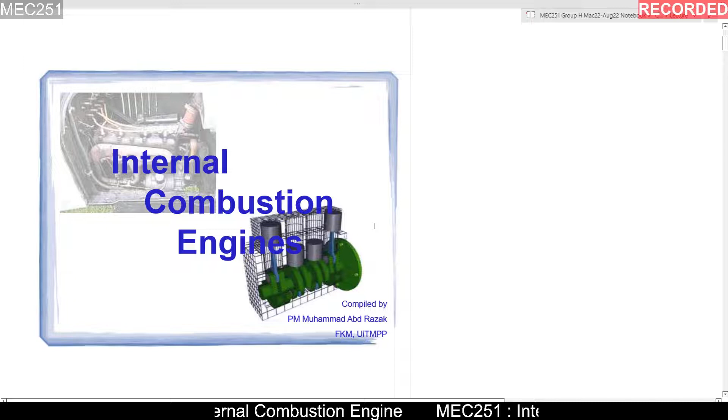Internal combustion engine, I think most of you have already heard about this. The common application is the engine in your car and your motorcycle, and most road vehicles still use the internal combustion engine, but in the future maybe it will be replaced by the electric motor, what we call the EV, electrical vehicle. But for the time being, the majority of transport in the world still uses the internal combustion engine, so this topic is still relevant to our real life.

So the history of the internal combustion engine started from the Otto findings. This is Nikolaus Otto, a German, in 1876. What he found is the system of an engine that uses two processes: one is the isentropic process, and the other is the constant volume process.

So if you want to know a little bit or refresh what you have already learned about the internal combustion engine, you can click on this link here, and it will redirect to YouTube, and you can see a 3 minute video.

And then I will try to explain based on the TS and PV diagram here. For the TS diagram, for the Brayton cycle before, we had pressure constant, but for the internal combustion here, the Otto cycle, we analyze the system based on constant volume. This is because we have a constant volume process instead of a constant pressure process as we found in the Brayton cycle in the previous chapter.

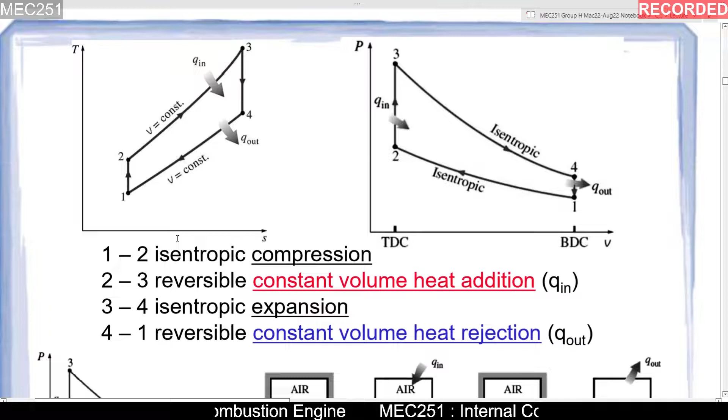So for the TS diagram here, from state 1 to state 2, similar to the Brayton cycle before, we have the isentropic compression. And then the heat addition goes into the system from state 2 to state 3, still similar to the Brayton cycle, but instead of pressure constant as in the Brayton, we now have constant volume here. So please memorize: state 2 to state 3 is the constant volume heat addition, heat addition because of the Q in here.

And then from 3 to 4, similar to the Brayton cycle before, we have isentropic expansion. This is the process that produces the work out, and then finally you have to exhaust, or reject heat outside. Similar to the Brayton cycle, as we found in our car engine, we just remove the Q out by using the exhaust. As you see at the back of your car, there is an exhaust pipe.

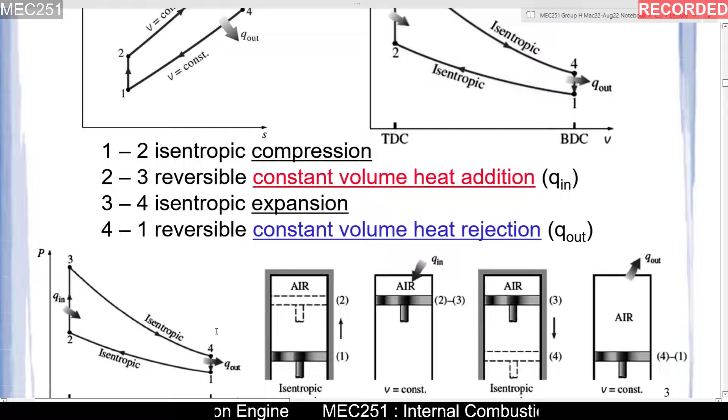And after you compress, the combustion will happen, where the air fuel mixture will be ignited by the spark plug, and then the combustion happens. It's like a detonation, meletup. And then when you have the combustion, the energy will push the piston down, as we see here in the isentropic expansion.

So during state 3 to state 4, there will be work output during this process. And finally, it goes back from state 4 to state 1, where the piston pushes back the gas produced by the combustion process. So here we have CO2, CO carbon monoxide, and maybe some nitrogen dioxide and so on, and it will be rejected to your exhaust.

Okay, so basically there is our principle of the Otto cycle. What you have to remember here is the TS diagram and PV diagram. So 1 to 2 is isentropic, 2 to 3 is heat addition at constant volume, 3 to 4 is isentropic expansion, and 4 to 1 is constant volume heat rejection. So similar to the Brayton cycle, just you change the pressure in the Brayton into volume here for the Otto cycle.

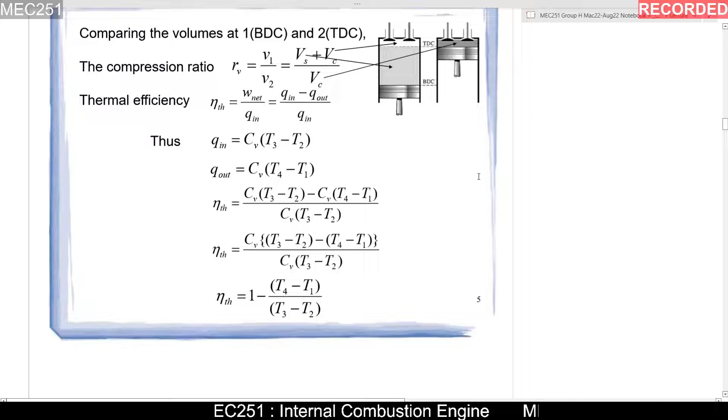So if in the Brayton cycle we have the pressure ratio, which is P2 over P1 or P3 over P4, that is the Brayton cycle. But for the Otto cycle here, internal combustion engines, we have the compression ratio. The compression ratio is V1 over V2, and the symbol here is RV. Pressure ratio is RP - P for pressure, V for volume.

And then our thermal efficiency, still you just have to remember this one. And our Q in - different compared to the Brayton cycle, because right now we have constant volume, so you have to use CV instead of CP. Because we know that CV is the specific heat capacity at constant volume. So because we have the constant volume process, we have to use CV, not CP.

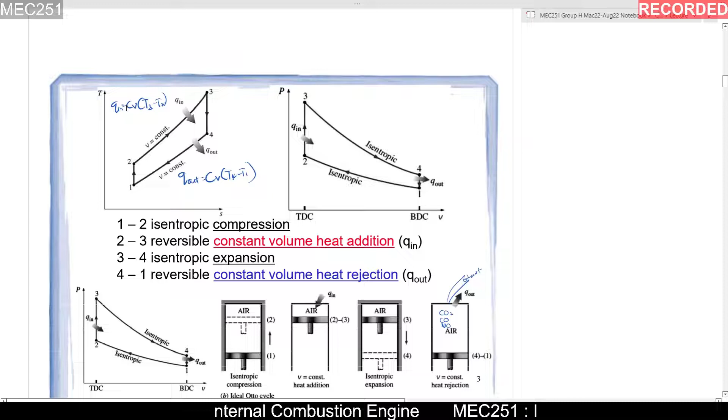And for the heat addition, Q in, you see here, state 3 and state 2, so temperature 3 minus temperature 2, and you have to multiply with CV because this is constant volume.

So the other thing is you have to know the formula for the isentropic process. Why? Because we already derived this before - we have 3 types of isentropic formulas, isentropic process equations. So we have to choose which one to use in this Otto cycle. It is related to the volume and the temperature. So we have to use this formula for the Otto cycle, and also for internal combustion engines in general.

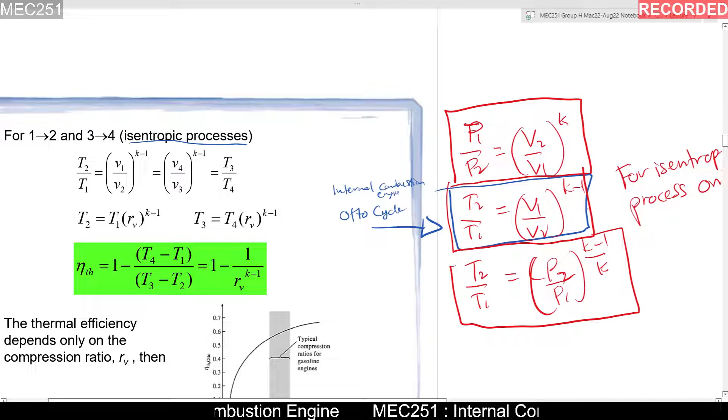So make sure you use this one for the isentropic process. Where is the isentropic process? Back to this slide, we have 2 isentropic processes here: between 1 and 2, which is the compression, and 3 to 4, which is the expansion, same as in the Brayton cycle before. So if you understand the Brayton cycle, the Otto cycle is quite easy for you.

Okay, we have to use that formula: T2 over T1 equals V1 over V2 to the power of K minus 1. Let me double check - T2 over T1, V1 over V2, to the power of K minus 1. Correct. You have to use this only for the isentropic process between state 1 and state 2, and the other one is the isentropic expansion process between state 3 and state 4.

You have to use T3 over T4 equal to V4 over V3 to the power of K minus 1. This is only used for the isentropic process, same as in the Brayton cycle for gas turbines where we only use it during isentropic conditions. So this formula only applies for isentropic processes. What if you use this formula for the state 2 and state 3 process? It's totally wrong. You cannot use this formula there.

For that case, which formula do we use? We use the normal one: P1 V1 over MRT1 equal to P2 V2 over MRT2, equal to P3 V3 over MRT3. Since it's the same mass and gas constant, you can simplify it to this form.

We have another relationship here. The volume is constant, so V2 over V3, since it's constant, has the same value, so you can cancel V from this equation. So this one can be used for state 2 and 3, and also state 4 and state 1.

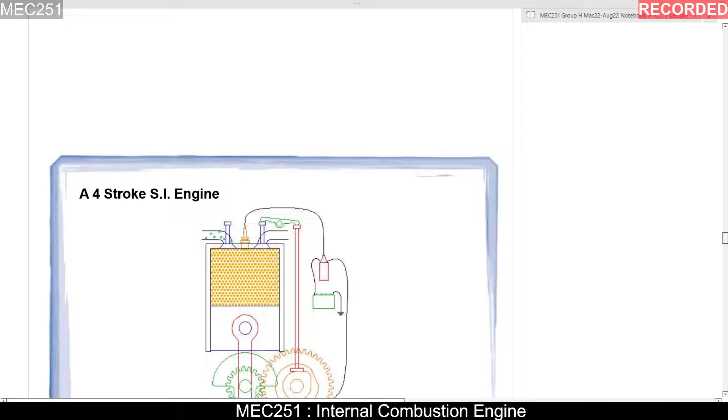Another parameter that you have to find is the MEP, mean effective pressure. Before, in the Brayton cycle for gas turbines, we had to calculate the work ratio and back work ratio, but for the internal combustion engine, we do not need to calculate the work ratio. Instead we have another parameter called the mean effective pressure, MEP.

Since it is a pressure, remember P times V equal to work. So the mean effective pressure, symbol PM, times V1 minus V2, will be equal to W net. Then you rearrange it as W net over V1 minus V2. I want you to remember this. If you substitute RV, since RV equal to V1 over V2, into this equation, you get the final formula. Either form is okay to remember.

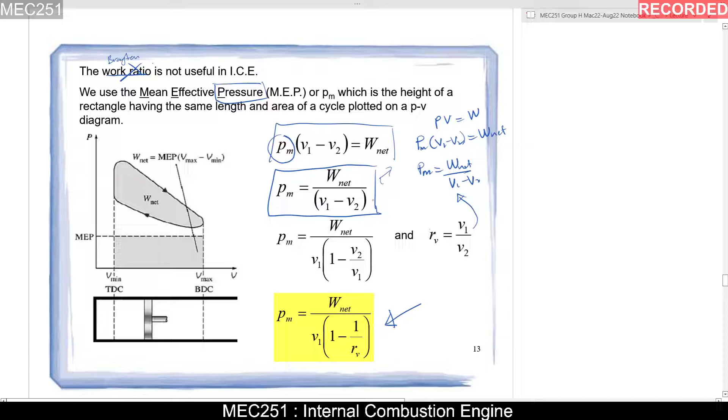So those are the parameters you have to find, basically similar to the Brayton cycle. Normally we start with the temperature, so we find T1, T2, T3, and T4. After getting these temperatures, the thermal efficiency equals W net over Q in, which is Q in minus Q out over Q in. To find Q in, use CV times T3 minus T2, and Q out is CV times T4 minus T1.

You have this value, and you will get the thermal efficiency. Normally in the test or final exam, you will also be asked to find the PM, mean effective pressure. PM equals W net over V1 minus V2. After getting W net, which is Q in minus Q out, you have to find V1 and V2. Since RV is normally given in the test or final exam, RV equal to V1 over V2, so you find the value of V1 and V2, put that into this formula, and you get the PM. PM must be in the unit of kilopascal.

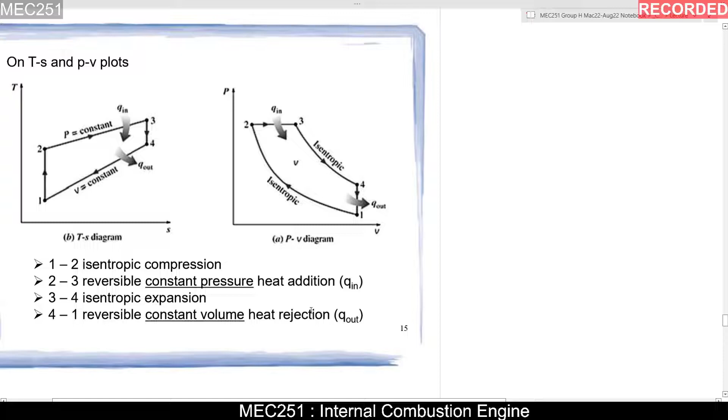So basically that's the flow for how to calculate questions regarding the Otto cycle. That's it for now. After we try these examples, I will go further into the diesel cycle and the dual cycle. Diesel and dual cycle are just a continuation after the Otto cycle. The diesel cycle is the principle or system used in diesel engines found in cars, trucks, lorries, buses, and so on. It's quite different but still similar to the Otto cycle. Finally, we also have the dual cycle, so don't worry about that.

Just to give you general info, for the final test, mostly the questions will ask you about the diesel and dual cycle. To this date, we never have a question about the Otto cycle because Otto is so simple. Normally you will be asked about the diesel and dual cycle.

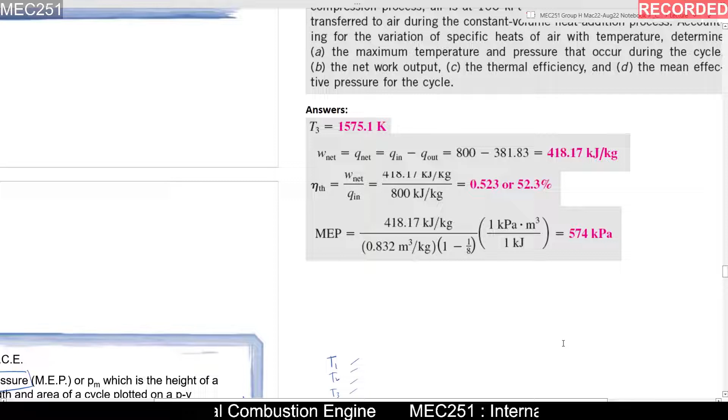So let's try this example from the textbook. The answer here is already given because this is the question from the textbook, but I will show you how to calculate it one by one. So stay tuned.

Example 9.2 from the textbook. An ideal Otto cycle has a compression ratio of 8, so RV here is 8. At the beginning of the compression process - before that, to make it easier for you to understand the question, I highly recommend you draw a TS diagram first.

TS diagram. You will just have two lines of volume because this is constant. So this is state 1. You will have the isentropic compression process from state 1 to state 2, constant volume heat addition until state 3, isentropic expansion from 3 to 4, and finally heat rejection at constant volume.

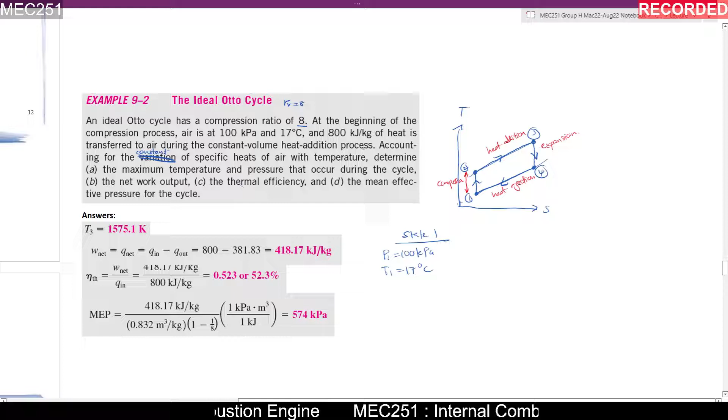When 800 kilojoule per kilogram of heat is transferred to the air during the constant volume heat addition process - which one, between 2 and 3, heat addition - so you put it there, 800 kilojoule per kilogram, the Q in. The value of Q in is already given, 800 kilojoule. So I put it here: state 2, state 3, state 4.

So we put the information here. 800 kilojoule is the Q in, so I put it here under state 3. So you write down the equation for Q in: Cv times T3 minus T2, which is equal to 800.

The original question here mentions variation of specific heat - perubahan specific heat - but because our syllabus only considers constant specific heat. In reality we should consider the variation, because the specific heat changes depending on temperature and so on. But in our syllabus, to make it simpler and easier for you, we consider constant specific heat only, so you just use one value of specific heat throughout the system. So in the end our results may be different compared to the textbook answer, because the textbook uses variation of specific heat, and my method here shows you the approach using constant specific heat. So our final answer will be different compared to this one - never mind, don't worry about that, just stick to my method for your syllabus.

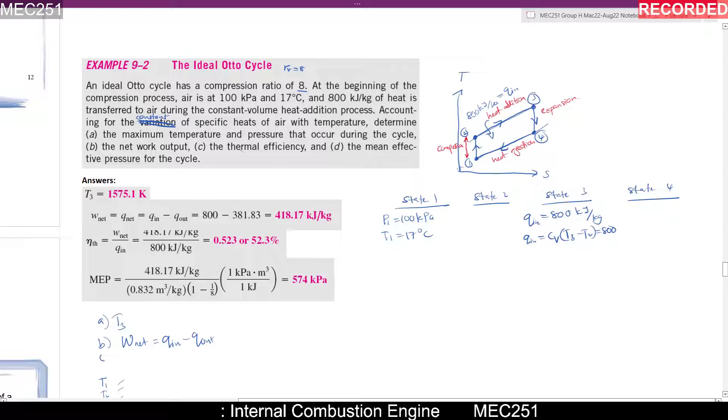And for B, you have to find the net output, W net. So I just put it here, Q in minus Q out. And C, thermal efficiency - you see there? That's what I mentioned earlier, we have to find the temperature, we have to find thermal efficiency, and before thermal efficiency we have to know the W net and so on. So this is the normal question for the Otto cycle and internal combustion engine in general, one you have to be very familiar with.

And finally D, you have to find the MEP, mean effective pressure, PM. So PM is equal to W net over V1 minus V2.

Make sure you put it here. Isentropic is between state 1 and 2, and another one is between state 3 to 4, isentropic. Between state 1 and state 2, we also have the RV, which is 8. RV is also equal to V1 over V2, equal to 8.

You see there, V4 over V3 is equal to 8, RV.

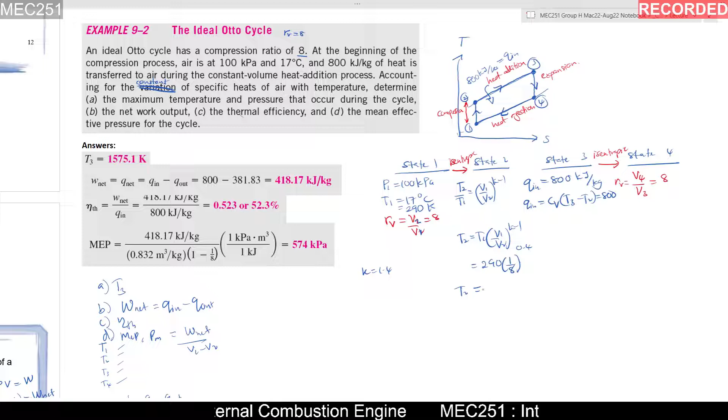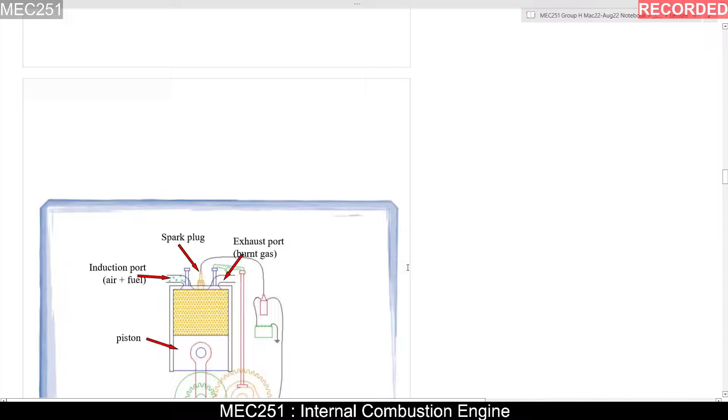Let me just check the compression ratio first. T2 over T1 equals V1 over V2, that's R. V1 over V2, okay, so this one will be...

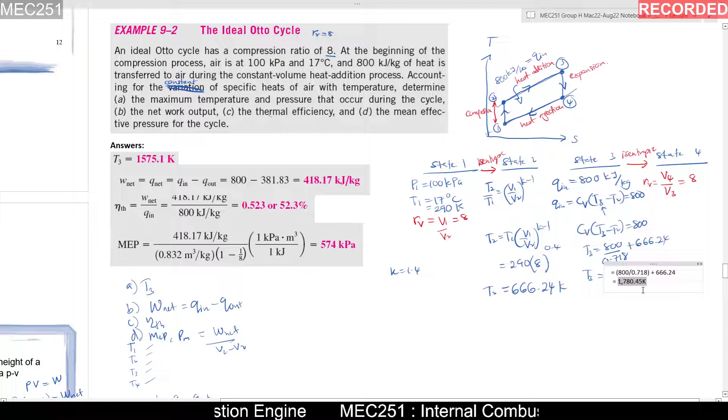And finally, we have to find T4. Between state 3 and state 4, we also have the isentropic process. This one, between 3 and 4, expansion, is isentropic expansion. This one is isentropic compression. So we can use this formula.

So T4 over T3 will equal to V3 over V4 to the power of K minus 1. So T4 will be T3 times V3 over V4 to the power of K minus 1. So T3 here is 1780.45. V3 over V4 is the reverse of the RV, so it will be 1 over 8.

1 over 8, to the power of 1.4 minus 1, and your T4 will be 1780.45 times bracket, 1 over 8 to the power of 0.4, close bracket, equal to 774.99 Kelvin, so I'll take two decimal places.

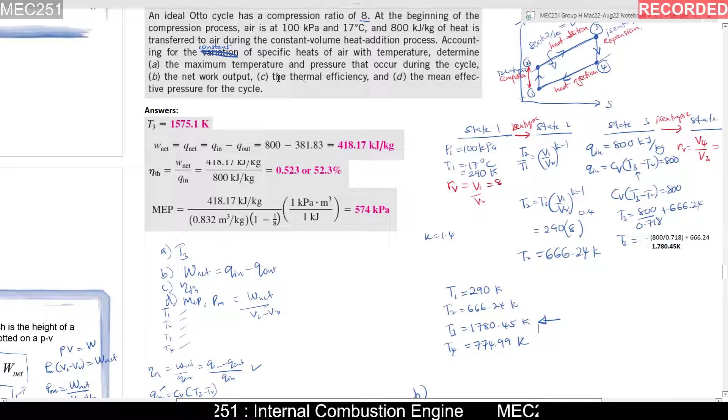So our B, this is our answer for the A question. Quite different, right, compared to the answers in the textbooks, because the textbooks use variation of specific heat, but for our syllabus we use constant specific heat, that CV there.

So B, we have to calculate the W net. W net for the Otto cycle is also equal to Q in minus Q out. Our Q in is between the constant volume state 2 and state 3, so Q in will be CV times T3 minus T2, minus Q out which is CV. Also Q out is between state 4 and state 1, so it will be T4 minus T1.

So you put 0.718 times T3, 1780.45, minus T2, 666.24, minus 0.718 times T4, 774.99, minus T1, 290. So our W net, because we don't have mass in front of the CV, our unit will be in kilojoule per kilogram.

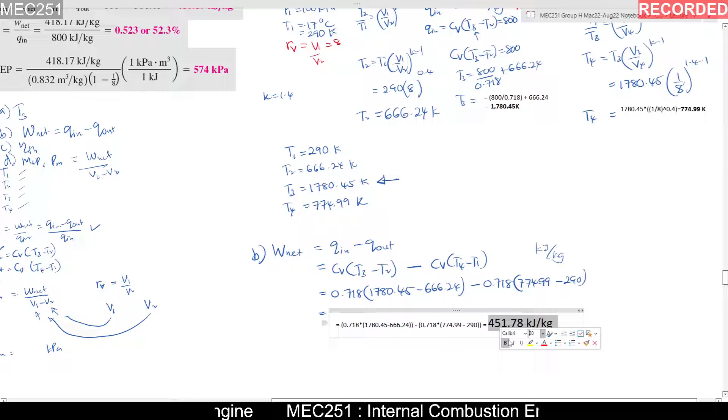Okay, so our W net is 451. Quite far off compared to the answer from the textbook, 418. We have 451, so never mind, just stick to my method.

Just follow my method. So for thermal efficiency, the number C, you have to find thermal efficiency. Thermal efficiency is W net over Q in. So you already have the value here, 451.78. So we just have to calculate Q in.

So 0.718 times 1780.45 minus 666.24, times 100%. So our thermal efficiency is 56.47%. So that's your answer.

And finally, you have to calculate the MEP, mean effective pressure, symbol PM, equal to W net over V1 minus V2. Because W net here is in the unit of kilojoule per kilogram, so for V, you also have to use the meter cube per kg unit.

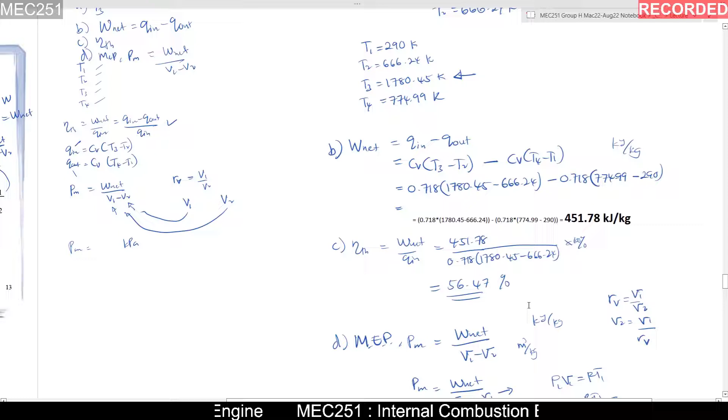So right now we only have to find V1. How to get the value of V1? We can use the gas equation, PV equal to RT. To find V1, you get V1 equal to RT1 over P1. So right now we have to use the parameters of temperature and pressure at state 1. State 1 we have 290 for the temperature, and for the pressure we have 100 kPa.

So 100 times 290, oh sorry, that is the R. R is also given in the question, so let's see the pass here. R for the air is 0.287, so you are going to use that value, 0.287. This is given, times with the temperature T1, 290 Kelvin, over P1, 100 kPa.

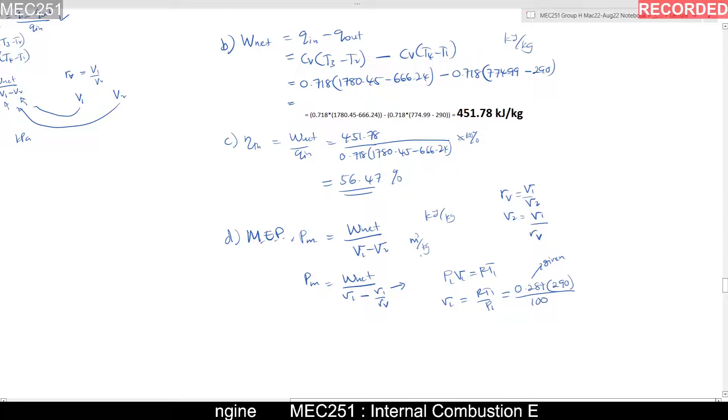So your V1 will be 0.287 times 290 over 100. So you will get 0.8323 meter cube per kg.

Use this formula, this value, so you have to substitute in this formula, so you will get PM equal to W net. We already have that value, 451.78, over V1, 0.8323 minus V1, 0.8323 over RV. RV is 8. So your mean effective pressure will be equal to...

620.35 kilopascal. So that is our answer. So you see, our value here is different because our work net is different. So that's all for example 9.2.

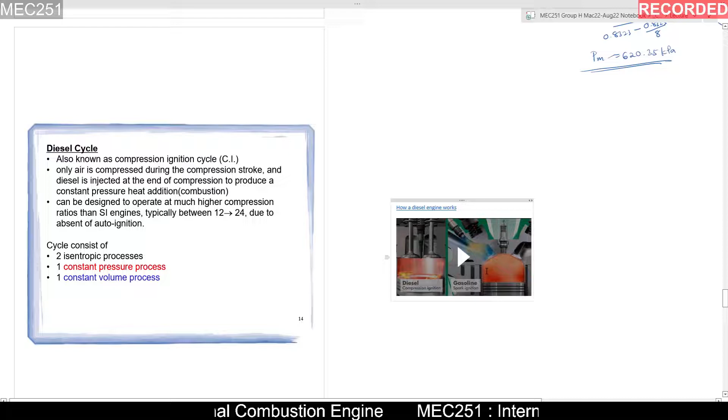Okay, so let's go to the diesel cycle. I already put a link to the YouTube video that explains the difference between the Otto cycle, gasoline, and also the diesel cycle. So in the diesel cycle, instead of using constant volume during the heat addition...

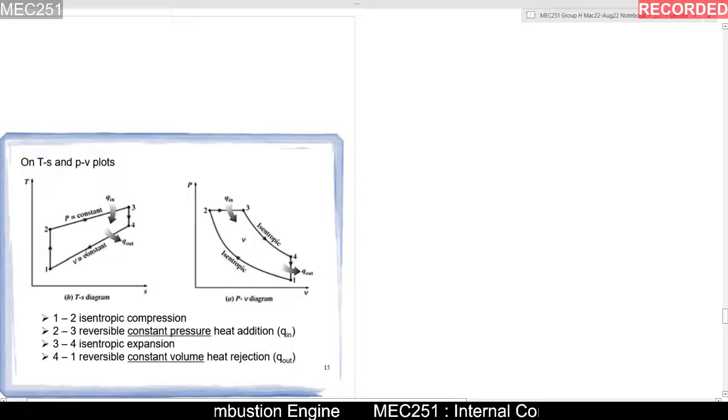We have both constant volume for the heat addition and constant volume for the heat rejection. This is the Otto cycle. But for the diesel cycle, they change a little bit at the heat addition. It uses constant pressure during the heat addition, Q in, and uses constant volume during the heat rejection. So instead of CV there, here we are going to use CP.

So this is diesel, that's the difference between diesel and Otto. Q in will be CP because the pressure is constant, so CP times T3 minus T2. And for Q out, still the same as the Otto cycle, we have to use CV because of the constant volume.

Okay, and on the PV diagram, you will get constant pressure there during the... okay, before that, for the Otto cycle, we have constant volume.

This one is Otto, this one is diesel. You see the difference there between the Q in. So 1, 2, 3, 4. The difference here between Q in for diesel, we use constant pressure because we don't have the spark plug in the diesel cycle. The ignition naturally happens during the compression process, so that's why the pressure there is constant.

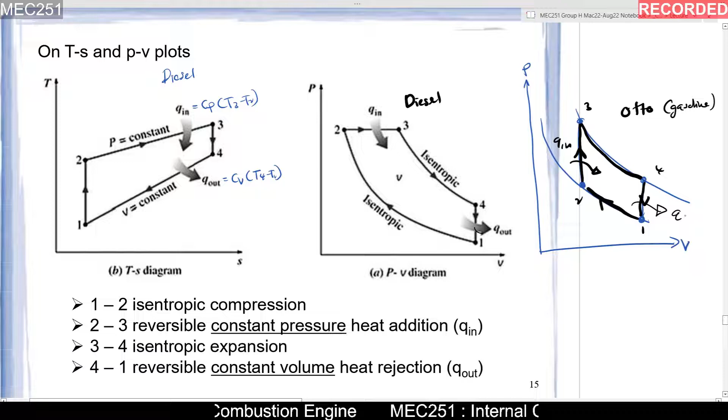So the difference here is between Otto, which is gasoline, the normal engine we use here, petrol, and diesel. So the difference is in the heat addition. During diesel we use constant pressure, during Otto we use constant volume, and for heat out still the same, we use constant volume.

The other things are quite similar, but we have another term for the cut-off ratio. Before that we have the RV, which is the compression ratio, which is V1 over V2, we call it compression ratio.

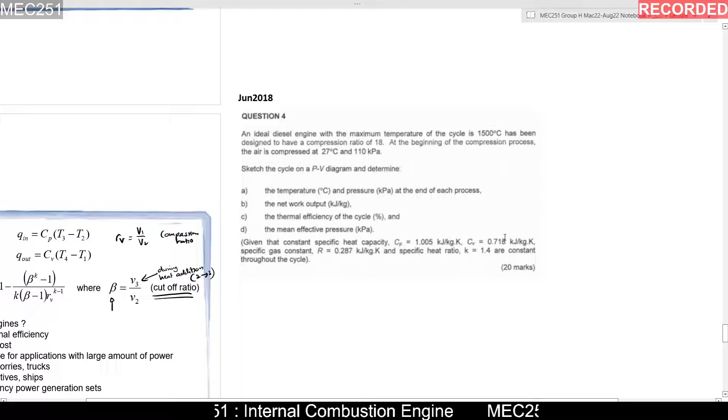So here is an ideal diesel engine with the maximum temperature of the cycle is 1500 degrees C. So you see there the temperature 3 is 1500 degrees C. Designed to have a compression ratio of 18, so this is the RV. At the beginning of the compression process, the air is compressed at 27 degrees C, so at the beginning of compression is between the state 1 lah. So this one is the temperature 1, so pressure 1, 110 kPa.

So the question here is the normal questions. You have to find the temperature, and extra answers you have to find is to find the pressure at every state. So we write down every state: state 1, state 2, state 3, and state 4.

So we list down the information that we already have. The T3 is 1500 degrees C, equal to, you have to plus 273, so 1773 Kelvin.

Okay, and then RV is between the state 2 and the state 1, so RV, V1 over V2 is 18, and then we have the temperature 1, 27 degrees C, equal to 300 Kelvin, and our pressure 1 equal to 110 kPa. Okay, so the isentropic process is similar between state 1 to state 2 and state 3 to state 4, isentropic.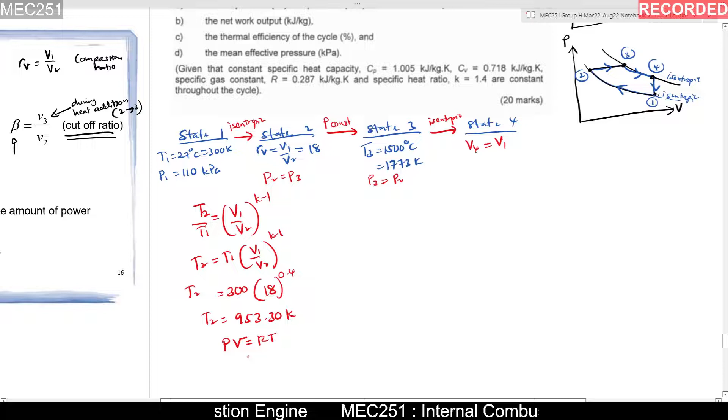Okay, so our pressure here, you can use PV equal to RT, but we don't have the volume, we don't have the volume, so we cannot find the P2, right? So that's okay.

We can relate state 2 and state 3, since it's P constant, so we can use this equation, ideal gas equation, which is P2 V2 over RT2 equal to P3 V3 over RT3.

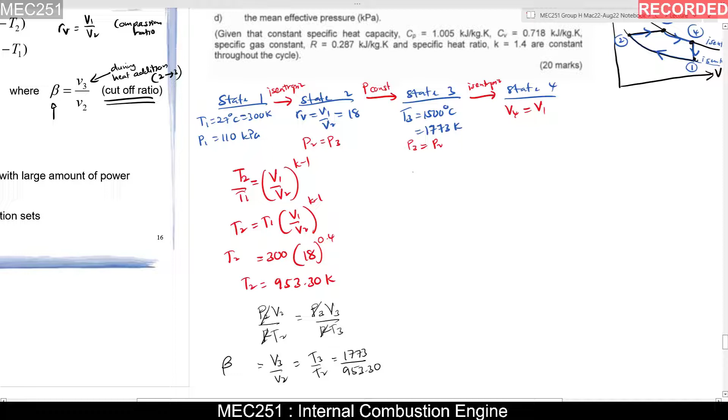Okay, so just KIV (keep in view) first to get the pressure. We try to find every temperature first. So P3 here, also KIV. We can use... okay, so for T2 we can use another formula for the isentropic process, which is equal to this one. We can use our another formula.

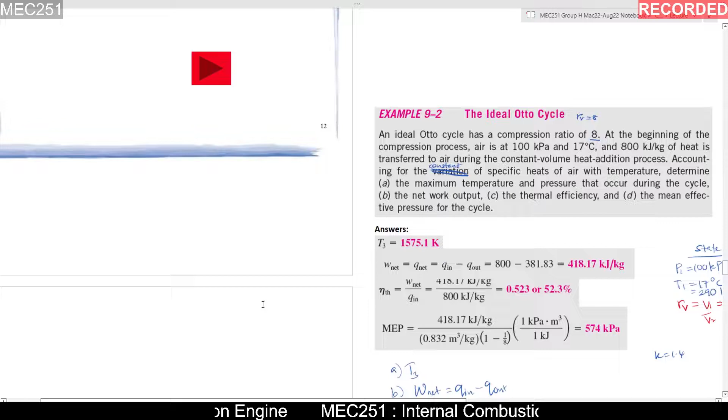Okay, right now we want to find our pressure, so we can use this formula, P1 over P2 equal to V2 over V1 to the power of K. Okay, so because it is an isentropic process, we can use any isentropic formula that you want. So right now we want to find the pressure, so we can use P2 over P1 equal to V1 over V2 to the power of K. So we already have P1, so P2 will be 110 times V1 over V2, which is our RV 18, so K is 1.4. So your P2 will be 6291.79 kPa. So that is our P2, temperature 2 and P2.

Okay, so P3 is also 9291.79 kPa. So we have already solved the pressure and temperature for state 1, state 2 and state 3.

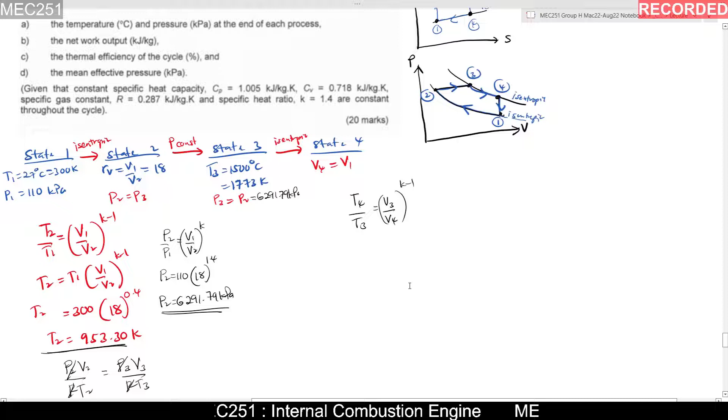The problem is we don't have V3 or V4 directly. So what we are going to do is find V3 over V4 using the multiplication product rule. We put V3 here, and V3 can relate to V2 because it's adjacent - V2 over V1, and this is V1 over V4. So if we cancel off V2 and V1, we still get V3 over V4, the same product as here. So this is what we call the multiplication product rule.

So right now we have V3 over V2, which is the cut-off ratio that we calculated here. This is cut-off ratio, and V2 over V1 is the compression ratio, and V1 over V4, since V4 equals V1, it will just be times 1. So V3 over V4 will be equal to cut-off ratio.

This is the value we already found, 1773 over 953.30, RV is 18, but here it's reversed, so you have to put 1 over 18, and V1 equals V4, so V1 over V4, since it has the same formula and value, let's say I put 8, so 8 over 8 equals 1, right? So even with 88 over 88, since they have the same value, it always equals 1, so you just multiply by 1.

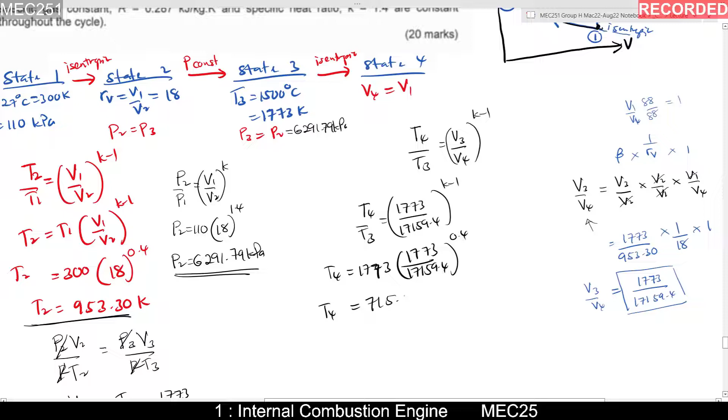So T4 over T3 will be 1773 over 17159.4, to the power of K minus 1. So our T4 equals T3, which is 1773, times 1773 over 17159.4, to the power of 0.4. So your T4 will be 715.14 Kelvin. That's our answer for T4.

And how about the pressure? You can use a similar method here. P4 over P3 - why can we use this formula? Because state 3 and state 4 is an isentropic process, so you can relate P4 and P3 using the isentropic formula like this: V3 over V4 to the power of K. So P4 will be P3, which is 6291.79, times V3 over V4.

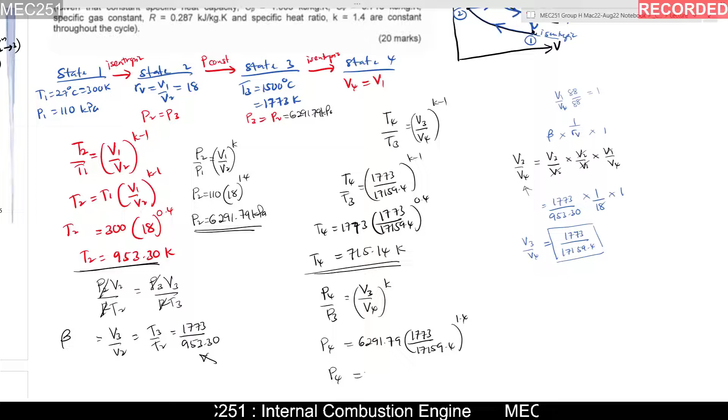This is 1773 over 17159.4, to the power of K, 1.4. So your P4 will be 262.22 kPa.

So we already solved our pressure and temperature. I put it here: T1 is 300 Kelvin. I just listed it for our convenience. T2 is 953.30 Kelvin, T3 is 1773 Kelvin, and T4 is 715.14. P1 is 110 kPa, P2 is 6291.79 kPa, P3 is also the same, 6291.79 kPa, and finally P4 is 262.22 kPa. So that's your answer for question A.

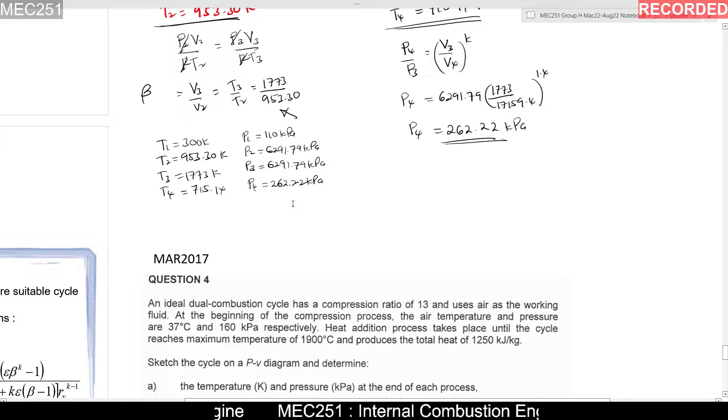And for B, I'll just move it up here. For part B, we have to find the net work output, W net, in units of kilojoule per kilogram. So our W net is equal to Q in minus Q out.

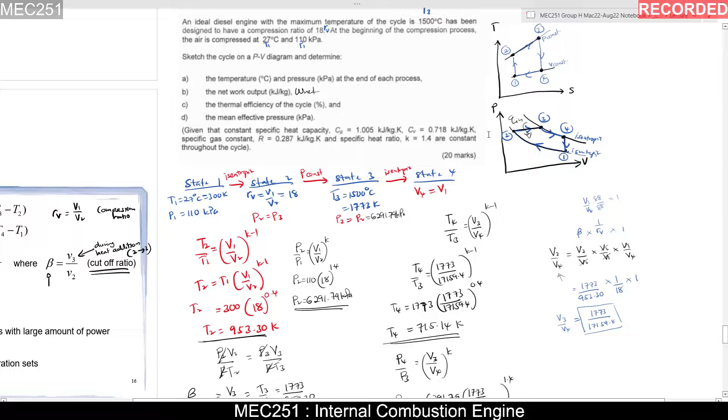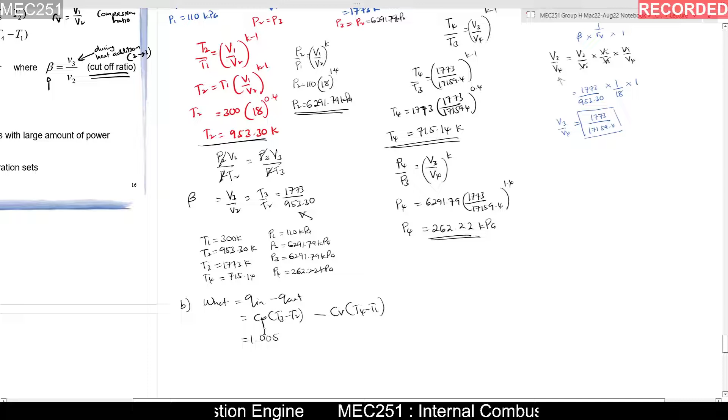Be careful here. The Q in for the diesel cycle is between state 2 and 3 - this is the Q in, and this is a constant pressure process, so you have to use CP for the Q in, don't use CV. For diesel we have constant pressure there, so we use CP times T3 minus T2. And for Q out here, this is constant volume, so we use CV times T4 minus T1. Our CP is 1.005 - it's already given in the question, along with CV.

So T3 is 1773 minus T2 which is 953.30, minus CV 0.718 times T4, 715.14 minus T1 which is 300 Kelvin. So your final answer for W net is 525.73 kilojoule per kilogram. That's your answer for B.

And for C, we need to find the thermal efficiency. As usual, thermal efficiency is required. It is equal to W net over Q in. So you already have your value for W net, 525.73, and now you have to find the Q in. So we just use this formula.

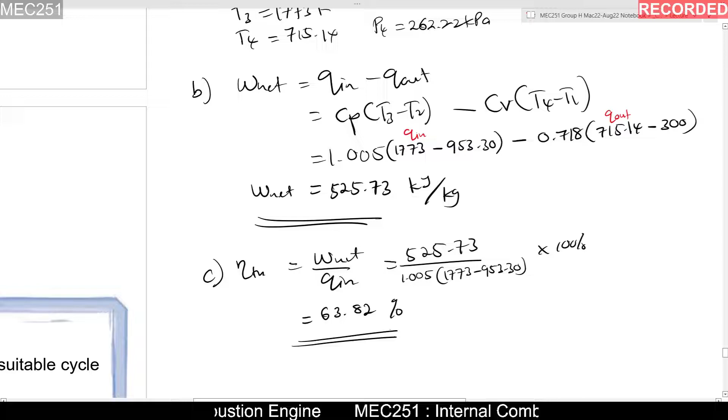So you will get 63.82%. Okay, and finally our D is mean effective pressure.

MEP, symbol Pm, is equal to W net over V1 minus V2. So to find the V1, you have to use PV equal to MRT. So P1, V1, equal to RT1. So V1 equal to...

RT1 over P1. So R is 0.287. How do we get the 0.287? You can refer to the questions here. 287, so use 287.

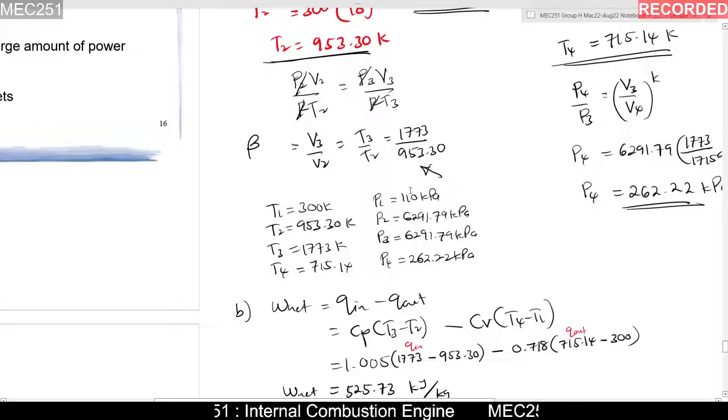Times the temperature 1, 300 Kelvin, and our P1 is 110. So you will get the V1 as 0.7827 meter cube per kg.

Okay, for the V2 you can use the same thing. V2 equal to RT2 over P2, since we already have the pressure 2, right? You can use this formula, same thing.

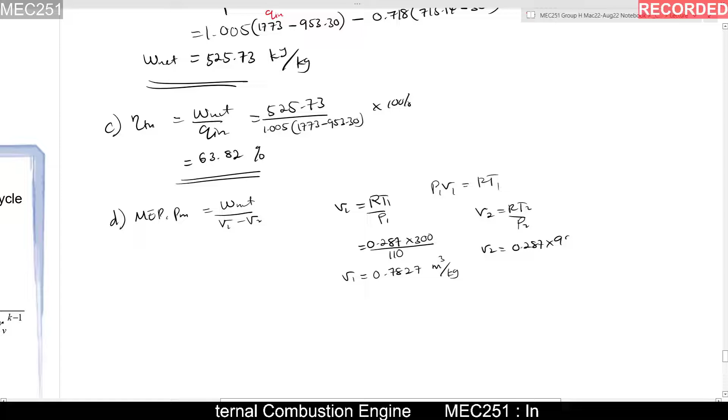Pressure 2 is... which one? 953.3 over P2 is not... 6291.79.

So your V2 will be 0.286... 0.0435 meter cube per kg.

Okay, so we substitute into this formula. So our PM here is 525.73 over V1, 0.7827 minus 0.0435. So your mean effective pressure will be...

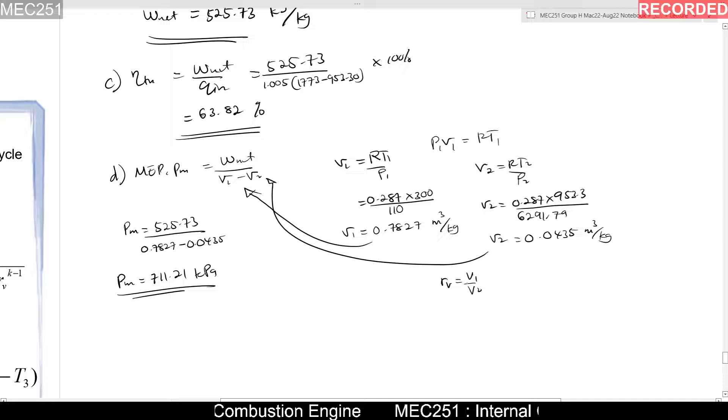711.21 kPa. Okay, so this one you have to find the V2. Another one I already showed you in the previous examples: we don't have to find the V2, we just manipulate this equation using the RV, because RV equal to V1 over V2.

So from here, I put an alternative method. So our PM, mean effective pressure, not the Prime Minister. So V2 equal to V1 over RV. Okay, so you substitute this one, so you will get V1 over RV. So the same, we just have to find the V1 only.

So it may cut a little time, make it faster to find the PM. So this is just another method. So W net...

525.73 over V1, 0.7827 minus V1, 0.7827 over RV, which is 18, right? RV is 18. Okay, so the answer should be the same as this one. So let's try.

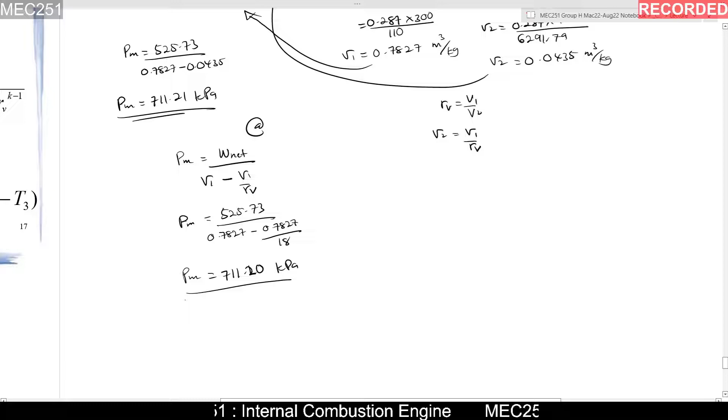Okay, so I get 711.20 kilopascal, just 2 decimal places off, so it is also correct. Good. So that's all how to answer the diesel engine question.

And the final subchapter here is the dual combustion cycle. This is the final piece. After diesel, we already have another version that combines the dual, meaning the Otto plus diesel.

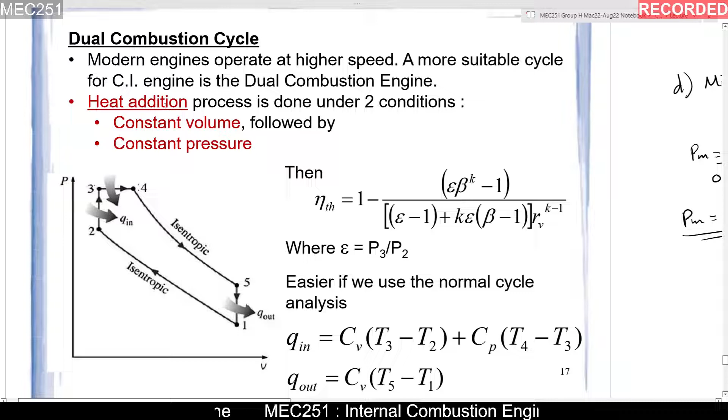So during the heat addition, there are two processes. One is the constant volume, this one between 2 and 3, and another one is 3 to 4. Instead of the diesel, we only have straight constant pressure, and for the Otto we only have constant volume. So why not we combine those two concepts? So as the outcome, we have the dual combustion cycle.

Okay, so the difference here is the Q in. You have to find two Q in. One is between the CP, T4 minus T3, and the other one is the Q in between 2 and 3.

So for this Q in, you have to use the CV because it's constant volume between 2 and 3, and constant pressure between 3 and 4. So for the Q in here, you have to use T3 minus T2. So that's why you have two types of Q in.

So you have to combine everything about the Q ins here. Between here is constant volume. This one during the constant pressure.

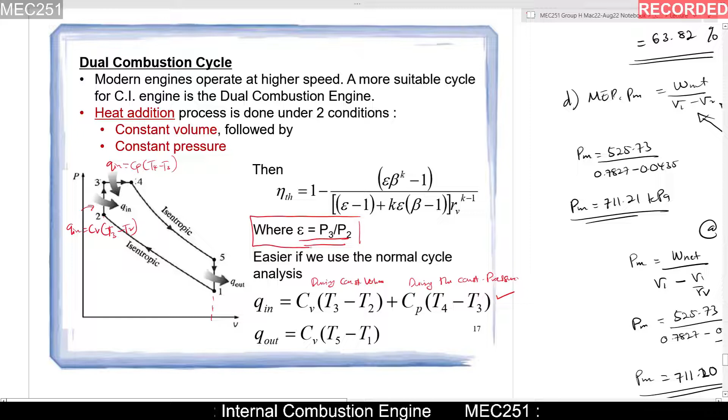Okay, so that's all. I will show you an example of the dual cycle. So after this, you have to do the tutorial. I already put this in the slides in this OneNote under the tutorial here.

So you see that in the past years' questions, most of the time they ask about the dual cycle. Let's see here: December 2019 dual cycle, December 2018 dual cycle, June 2019 dual cycle, January 2018 dual cycle, and June 2018 diesel.

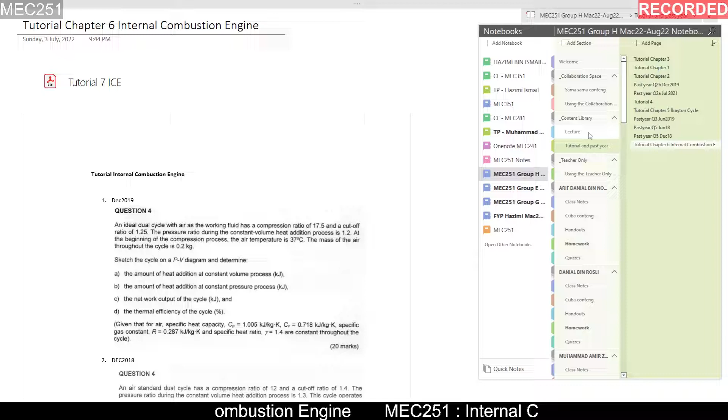So most of the time it's dual cycle or diesel. So focus more on the dual and diesel lah. Okay.

I will show you the final example here, March 2017. After that, we officially finish our lecture of this MEC251, and you can focus on doing your exercises. I've mentioned many times before, to score MEC251 you have to do a lot of exercises, a lot of past years questions.

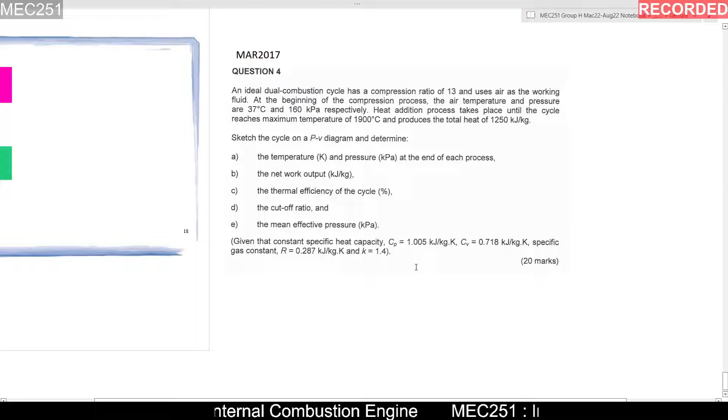Okay, so let's try this March 2017 dual combustion cycle. Let's read the question. Dual combustion - so you have to draw the PV diagram, it looks like this.

Because of the dual cycle, we have two processes that use constant volume here and constant pressure here. So the Q in happens between 2 and 3, and also 3 to 4. So this is the Q in, and this one is also the Q in.

Let's continue. It has a compression ratio of 13, so this is the rv, which is V1 over V2 equal to 13, and use air as the working fluid. At the beginning of the compression process - this one lah, before it compresses, state 1 - the air temperature and pressure are 37 degrees C.

So at the beginning of the compression, this is state 1. So 37 is T1, 160 is P1, respectively. Heat addition process takes place until the cycle reaches maximum temperature of 1900 degrees C.

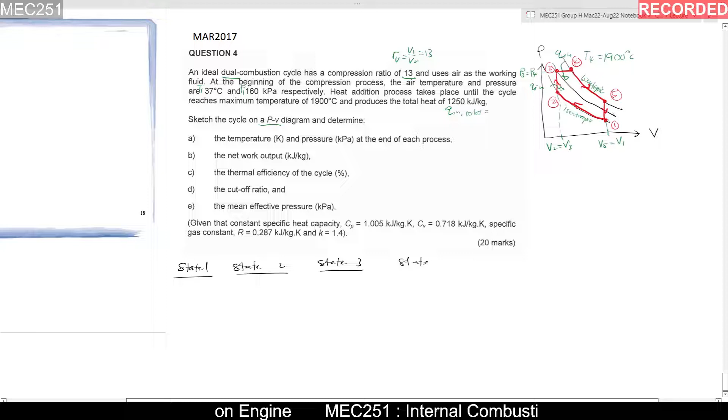I already sketched here. So after that, you have to write down state 1, state 2, state 3, state 4, and finally state 5.

Okay, you write down the process between 1 and 2. Going from 1 to 2 is isentropic. 2 to 3 is constant volume. So 3 to 4 is constant pressure. And finally 4 to 5 is isentropic again. And 5 to 1 is constant volume.

Okay, so we wrote down everything. State 1 we have temperature 1, 37 degrees C equal to plus 273, so 310 Kelvin. So our P1 is 160 kPa.

After that we have the rv, which is V1 over V2 equal to 13. And then we have the temperature at state 4. This one, the highest or the maximum temperature, is after the Q in. So here lah, T4 equal to 1900 degrees C.

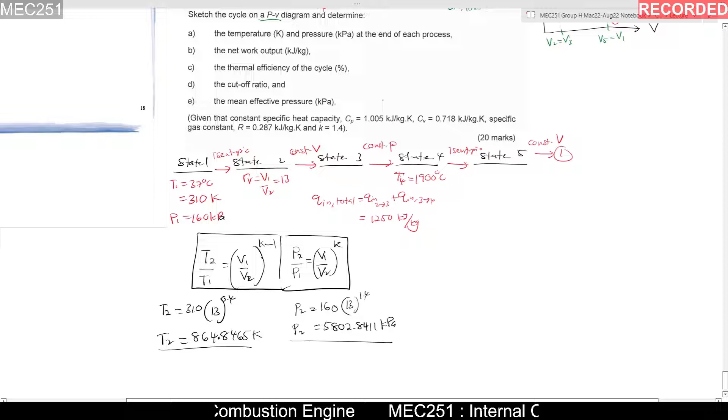for the state 3, it is the constant V, so V3 equal to V2. We can use this formula that is already given and value 1250. So just write down

Q in 2 to 3 is between the volume constant, so you can use the CV, T3 minus T2, plus, okay, Q in here is between 3 and 4. This is the CP, so you must use the CP there, T4 minus T3. Okay, is equal to 1250. So we write down here CV is 0.718.

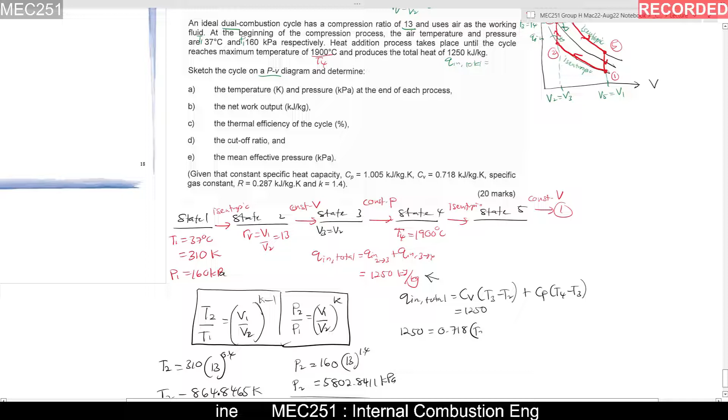T3 we don't have yet. T2 we already have 864.8465, plus CP is 1.005 already given. T4 we already have 1900, equal to change to the Kelvin unit,

2173 Kelvin. So 2173 minus T3. Okay, so the unknown value here is only T3, so we can find the T3 using simultaneous equation. So

okay, I will show you every steps here. 1250 equal to 0.718 T3 minus,

I see, 864.8465, 620.9598, plus

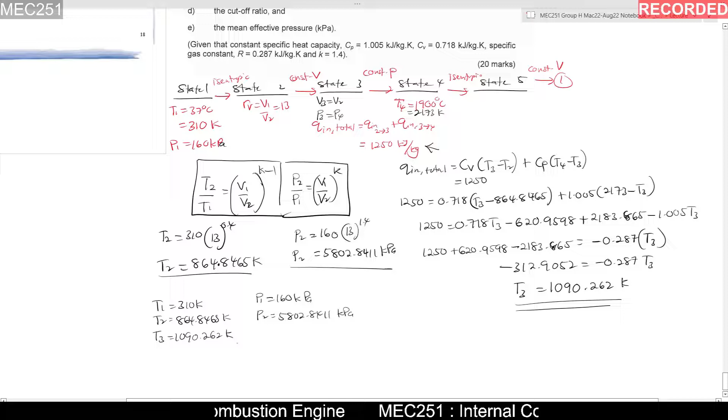T1 equal to 310 Kelvin. T2 equal to 864.8465. T3 is 1090.262 Kelvin. Okay, and for the time being we have P1, P2, okay, and P3 we don't have it yet.

Okay, so let's go to the T4. We already have the value T4, 2173 Kelvin. Okay, so we have to find the P4 and T5 and also pressure at state 5. Okay, so

let's go to the state 4 and state 5. Because it is isentropic, we also can use the formula of this one. So T5 over T4 will be equal to V4 over V5. Is it correct? Yes.

K minus 1. Okay, and T5 will be equal to T4, 2173, V4 over V5. K is 1.4 minus 1 is 0.4. So the problem here is to find the V4 over V5.

We can use the multiplication or product rule. V4 over V5 equal to, we start with the V4 with the V3, and then V3 with the V2, and then V2 with the V1, and then V1 with the V5. So if we cancel off everything here, V3, V3, V2, V2, V1, V1, we still get the V4 over V5.

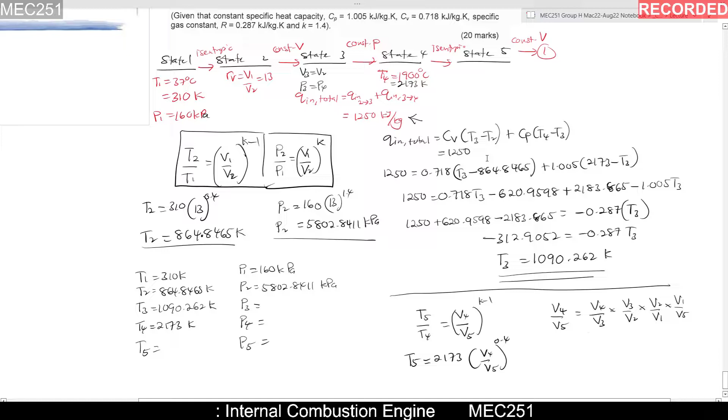Okay, so V4 over V3, we cannot get that, but we can refer to the ideal gas equation, which is P4 V4 over RT4 equal to P3 V3 over RT3.

So we can cancel off R, and then between 4 and 3 you see that there is the constant P, so we can cancel off P. So you will get V4 over T4 equal to V3 over T3.

Okay, so we rearrange temperature with the temperature and volume with the volume. So you will get V4 over V3 equal to T4 over T3. Is it correct? V4... this one goes the T4. Okay, is it? Okay, is it correct? It's correct already. Okay, T4 over T3.

Okay, this goes up, V4 over V3. This goes down, V3, V4 over V3. Okay, so T4 over T3 is 2173. This one, 2173 over T3 is 1090.262. So we already have V4 over V3 here.

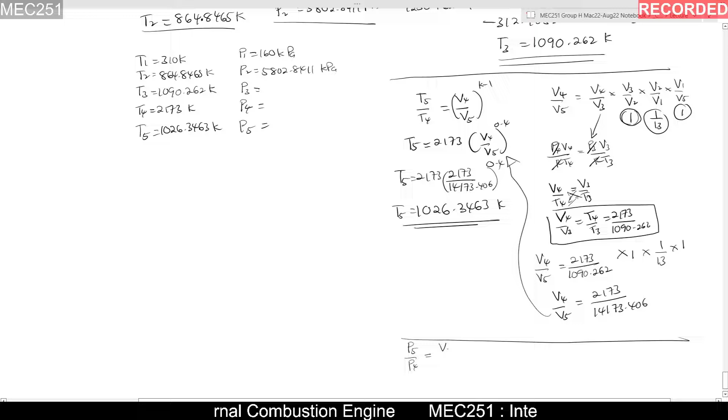1026.3463 Kelvin. Okay, so and then we also have to find the pressure, right? Use the same method. P5 over P4 equal to V4 over V5 to the power of K. So P5 will be P4, we also don't have yet.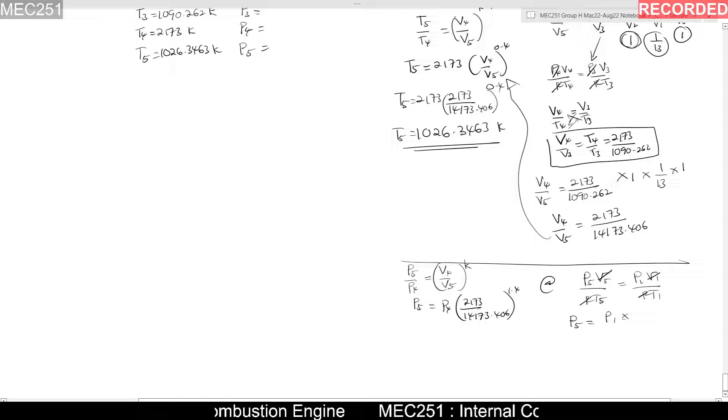If we want to find V5 and P5, we can also try the alternate, which is we relate state 5 with state 1. We use PV: P5 V5 over RT5, equal to P1 V1 over RT1. So R we cancel off, and between V1 and V5 the volume is constant, so we can cancel off volume there, and then P5 will be equal to P1 times T5 over T1.

So we already have P1, right? 160. So you get 160 times T5. 1026.3463 over T1 is 310. So our P5 will be 529.7271 kPa. So put it here, 529.7271 kPa.

This formula here, we don't have to find P5 alone; we have to use the P5 value to find P4. So we rearrange back to get P4. P4 will be P5 over this one, 2173 over 14173.406, power of 1.4. So our P4 will be

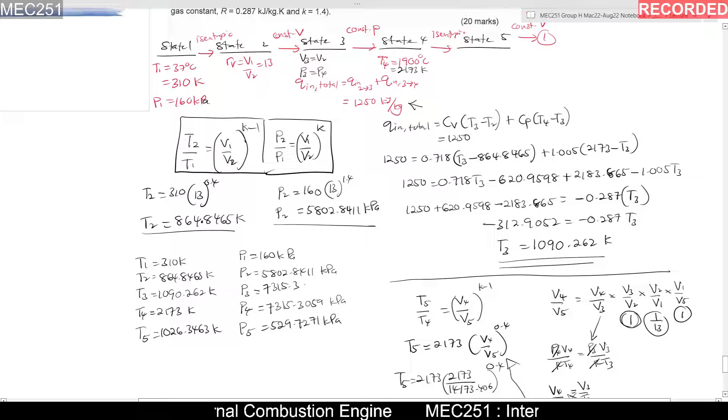7315.3059 kPa, and then put it there, 7315.3059 kPa. And finally, because state 3 and state 4 have the same pressure, P3 also equals 7315.3059 kPa. So you already go halfway there after you get all the temperatures.

Okay, so this is question A, and question B is the work net output. It's just the easy one. Work net is Q in minus Q out. So we already have the value of Q in, total 1250. But the Q out we must calculate first.

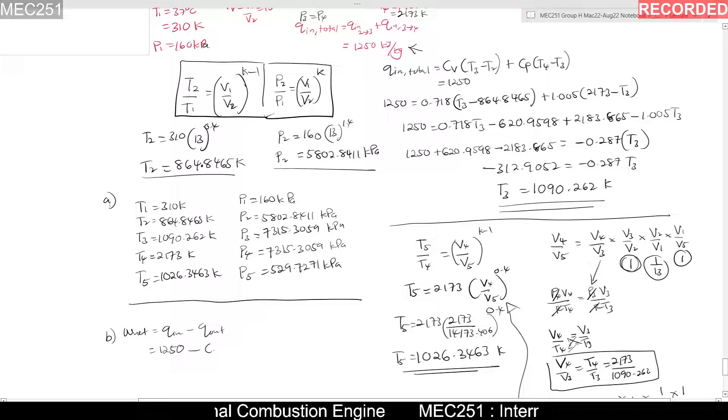The Q out here is between 5 and 1, and it has constant volume, so CV times T5 minus T1. So you get CV is 0.718, T5 is 1026.3463 minus T1 310. So you get W net is 735.6634 kilojoule per kilogram.

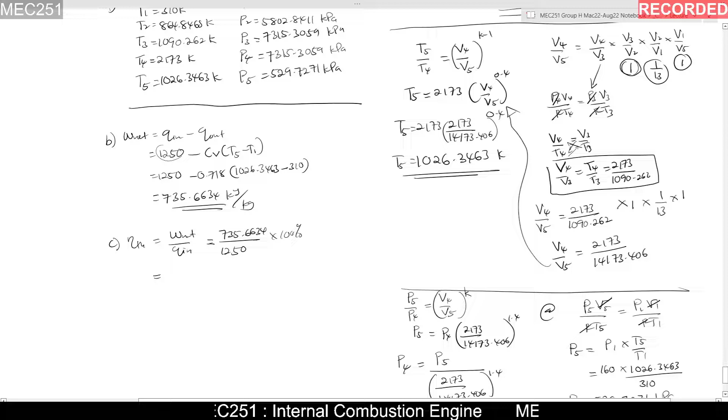And C is thermal efficiency. Thermal efficiency is W net over Q in, equal to 735.6634 over Q in. Q in is already given here, 1250, times 100%. So you get 58.85%.

And D, okay, this is the cut-off ratio. Basically the cut-off ratio is between the constant P process, so it is V4 over V3. So the value here, V4 over V3, this one - we already have obtained that value.

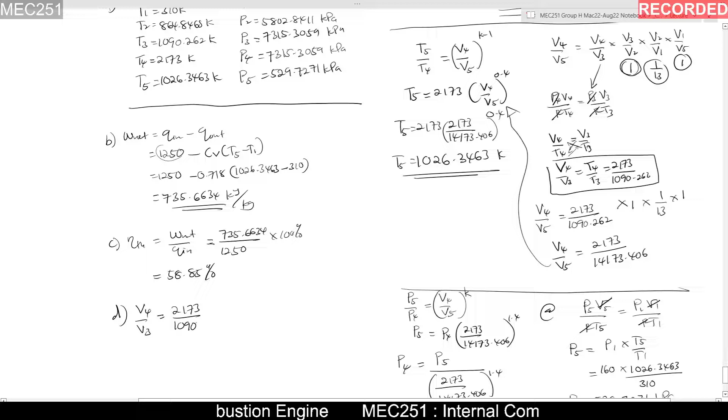Because if we don't have that cut-off ratio, we cannot solve temperature 5, so we just write it down back here. V4 over V3 is 2173 over 1090. Sorry, betul lah. 0.262. Okay, that's our answer.

And finally, mean effective pressure, right? So MEP equal to W net over V1 minus V2. So we can use W net over V1 minus, since RV equal to V1 over V2, so our V2 is equal to V1 over RV. So we substitute back, V1 over RV.

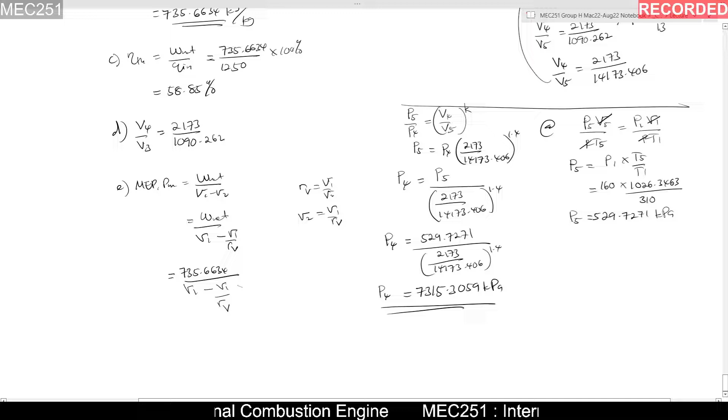So our W net is 735.6634 minus, sorry, V1 minus V1 over RV. Okay, so to find V1, we can use P1 V1 equal to RT. So V1 equal to RT over P1.

So you get R is 0.287, T1 is 310, and P1 is 160. So our V1 is equal to 0.5561 meter cube per kg. So put it there, so you get RV value is 13.

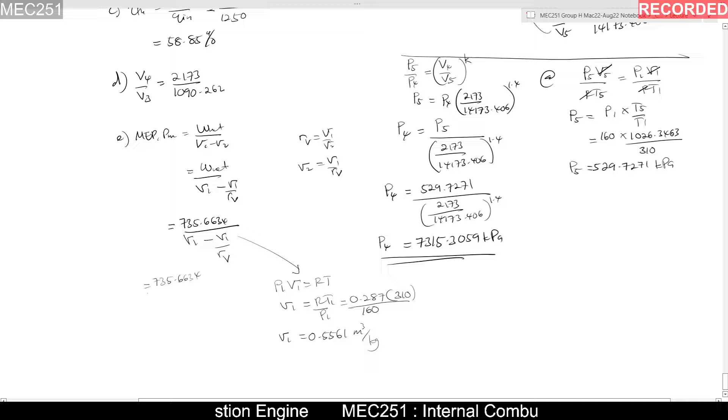Our mean effective pressure is 1433.14 kPa. Okay, so that's the answer.

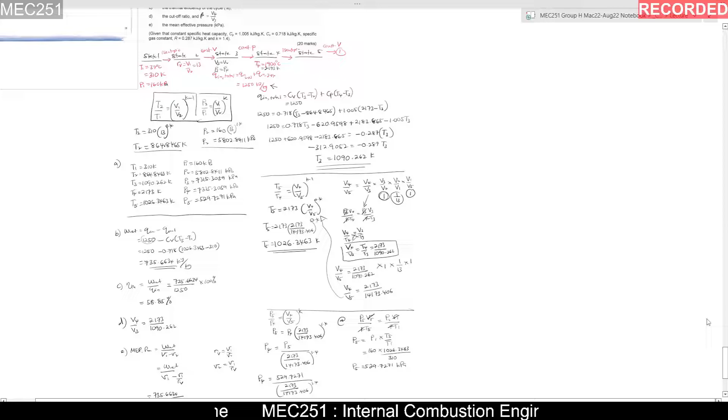See here, there's a lot of calculation that you have to do, and if you're not familiar with the techniques and methods here, you will have difficulty during your test and your final exam.

Oh sorry, this chapter will only be in the final test, so there will be no internal combustion engine in test 2. Test 2 only covers the Rankine cycle and the Brayton cycle. So internal combustion engine will be asked in the final test only.